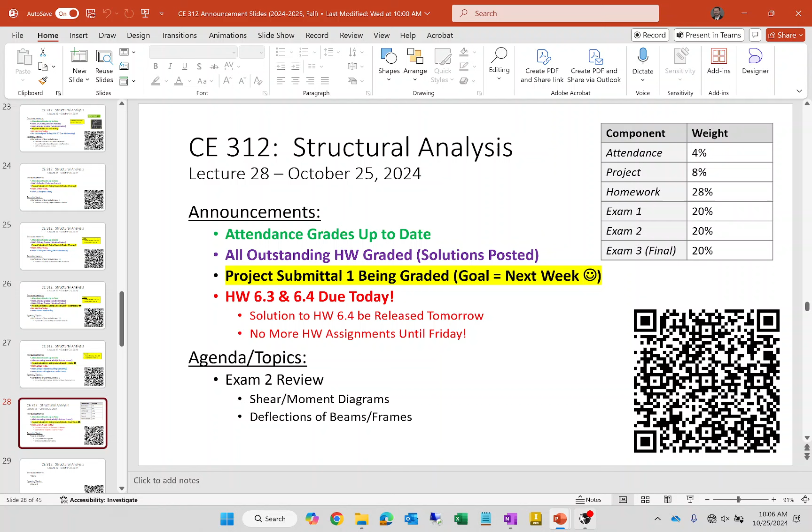And I think you'll find that it'll be homework 7. You'll spend more time on homework 7 sort of formatting the submission as opposed to actually doing the work. It'll be pretty quick, and we'll have in-class examples on all that. But that's not our topic for today. Our topic for today is the exam review. Let's talk about the exam. Okay, so let me pull this up.

So first off, the exam format will be pretty much the same format as the last exam. There are a couple things worth mentioning. Number one, I think we would all agree that a straight edge would be very useful on this exam for the purposes of constructing shear and moment diagrams. I do think that would be a very worthwhile addition to what you bring on Monday. The other thing I'll tell you a little bit about the format.

So as an example, let's say I have you construct a shear and moment diagram. I will give you space to do that, like the guidelines and the lines, because is that really a test of your ability to construct a shear and moment diagram, whether you can draw a horizontal line and put a V next to it, or draw another one and put an M next to it? So I'll give you some space so that you're not wasting your time on that.

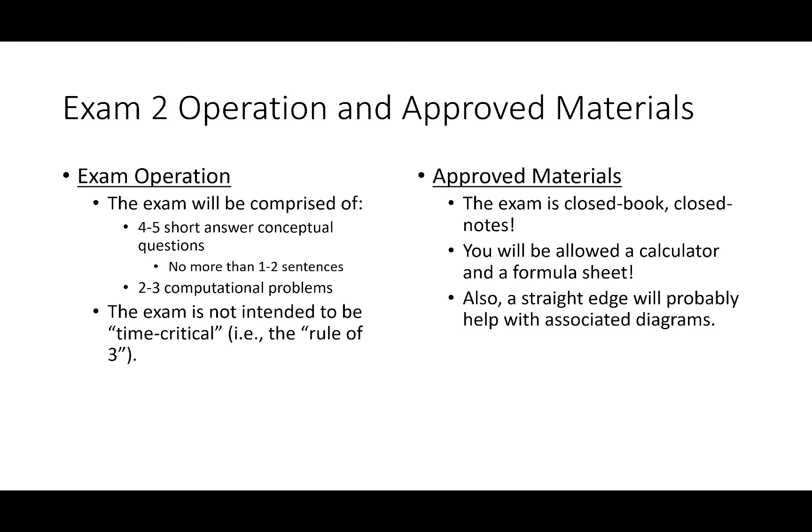I have the same rules as the formula sheet for the last one. I don't really care what you put on it as long as you make it yourself and you don't put a full start-to-finish worked out example on it. You can put snippets of examples, and I'll give you some freedom to format that formula sheet however you want. I just want you to make it. Same rules as last time.

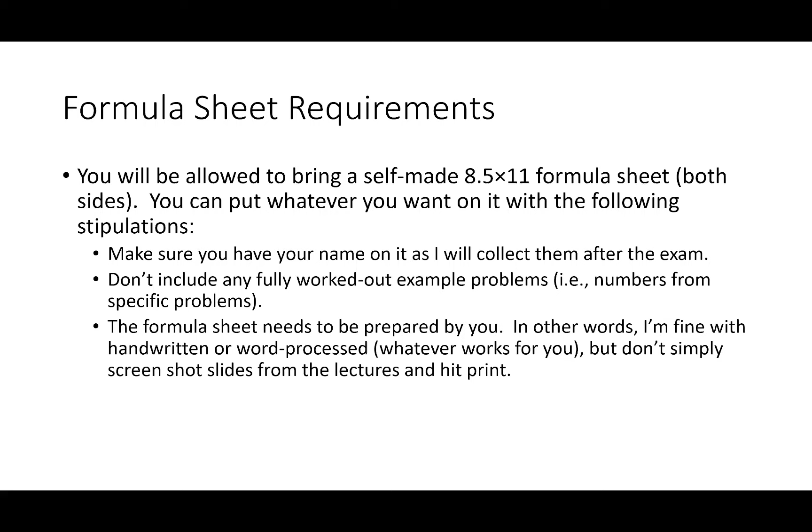Let's talk about what's on the exam, and the star of the show for the exam are shear and moment diagrams and deflections. Now, because of the nature of what we're doing in here, I do have to mention that you've got to compute support reactions too, okay? I don't mean for this exam to be a repeat of exam 1, okay?

So if you remember on exam 1, I gave you a pretty challenging support reactions problem, okay? I'm not going to do that type of exercise on exam 2, but you cannot do a lot of these analyses without the presence of reactions. In some instances, I may give you the reactions and just have you move from there. Some instances, you may have to compute them. But I don't want you to think that the computation of support reactions is totally not fair game, because it is. It's part of the analysis.

But the star of the show is deflections and shear and moment diagrams. So on the topic of shear and moment diagrams, you really need to be able to do 3 things. You need to be able to determine the internal shear and moment at any given point. And you can do that 2 ways. You can either cut a section at the point in question and write equations of equilibrium, or you can construct the shear and moment diagram and just say, what is the shear here? What is the moment here? And if the shear and moment diagrams are relatively linear, then you should be able to do that.

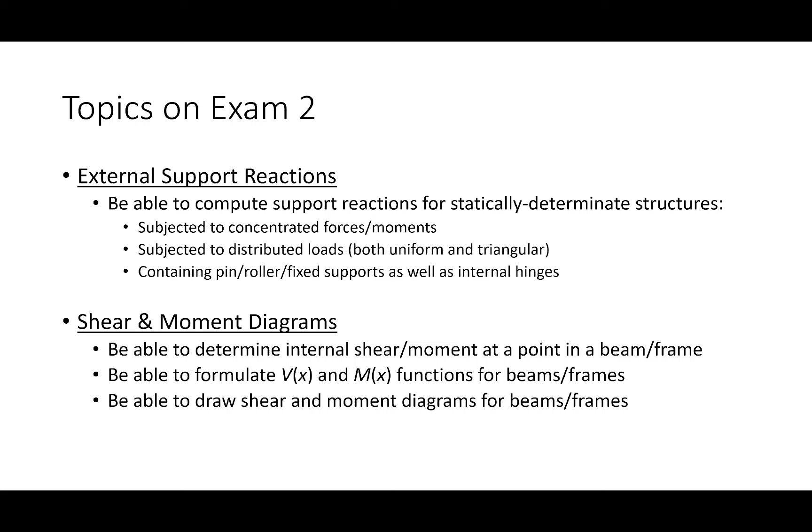You do need to be able to formulate functions, specifically shear functions and moment functions for beams and frames. So that's the algebra portion of it. And you do need to be able to draw them. You actually need to be able to construct the shear and moment diagrams, most likely using the graphical approach that we've been using this whole time.

As for deflections, yes, you do need to be able to compute deflections in structures, so you need to be able to analyze real structures and virtual structures. You need to be able to compute both displacements and rotations, and you need to be able to consider both axial and flexural deformations as appropriate. And so that's more on the behavioral aspect. Like if you remember when we were doing frames, we found that axial deformations really didn't affect the answer all that much.

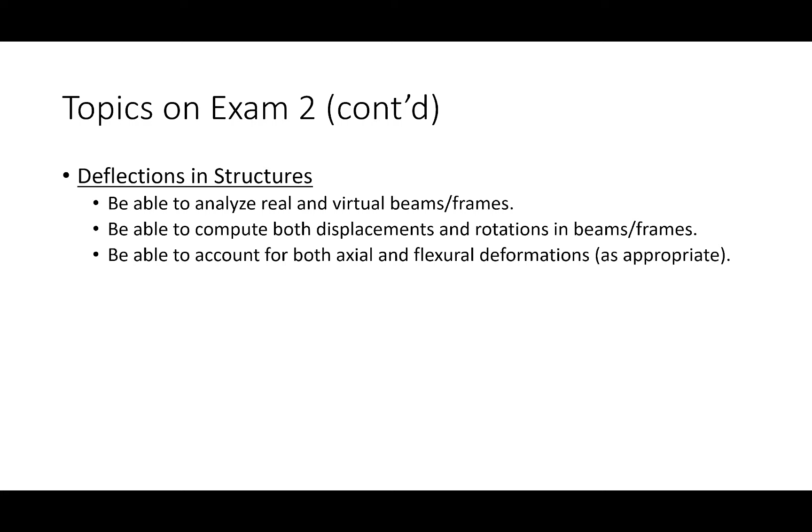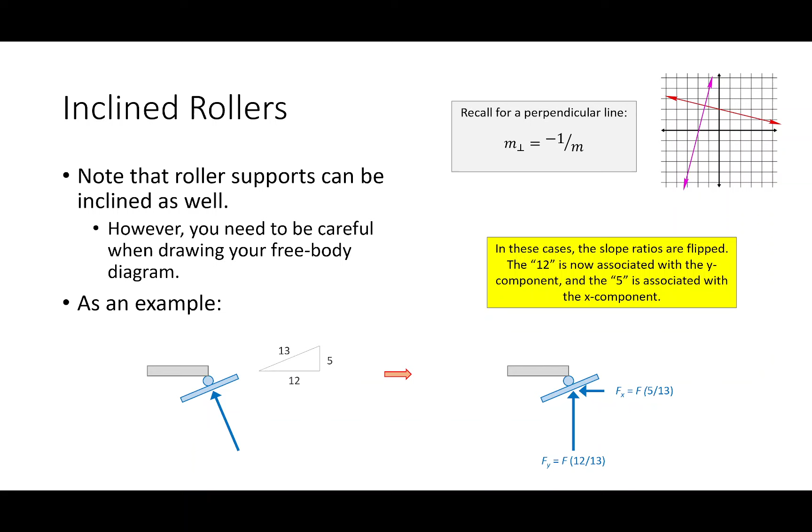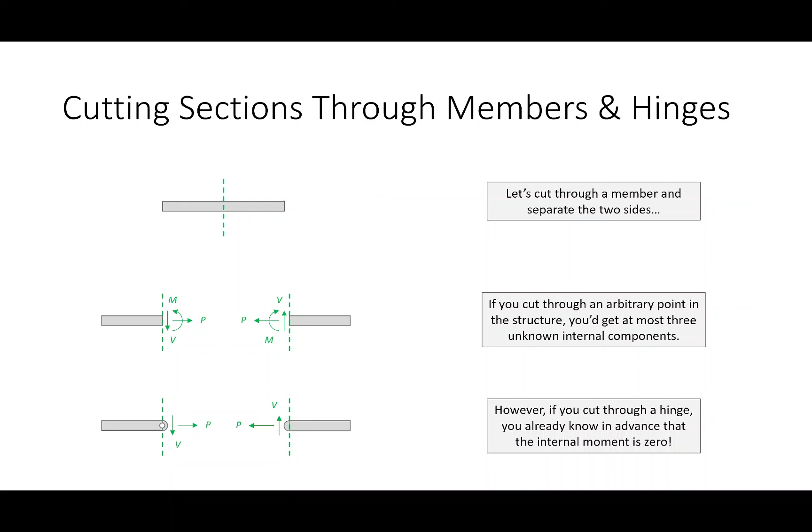The rest of this is just some greatest hits since the start of the semester. I did put stuff here on supports and inclined rollers, and honestly, I just copied a lot of this from exam 1. I'm not going to get hyper inventive again on computing support reactions, but again, you do need to be able to do it. You do need to understand that when you cut a section through a hinge, there is no internal moment. You do need to understand the derived relationship between loads, shears, and moments: if you integrate the loads, that results in the shear diagram, and if you integrate the shears, that results in the moment diagram.

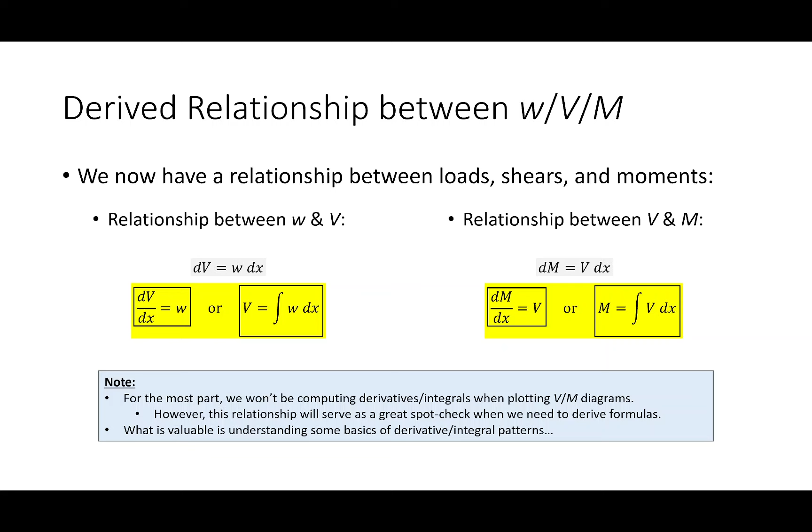This is our graphical approach, and we've been using this slide. A lot of times we breezed past it, but we really used this slide for the past 3 weeks. If we're looking at the relationship between load and shear, at any given point, the slope on the shear diagram equals whatever the load is right up above. And between any 2 points, the change in shear is equal to however much load there was between those 2 points. So for example, with a beam with a series of point loads, between those point loads there's no load, so the shear diagram was flat. That's why we got that stair-step pattern on shear diagrams with point loads.

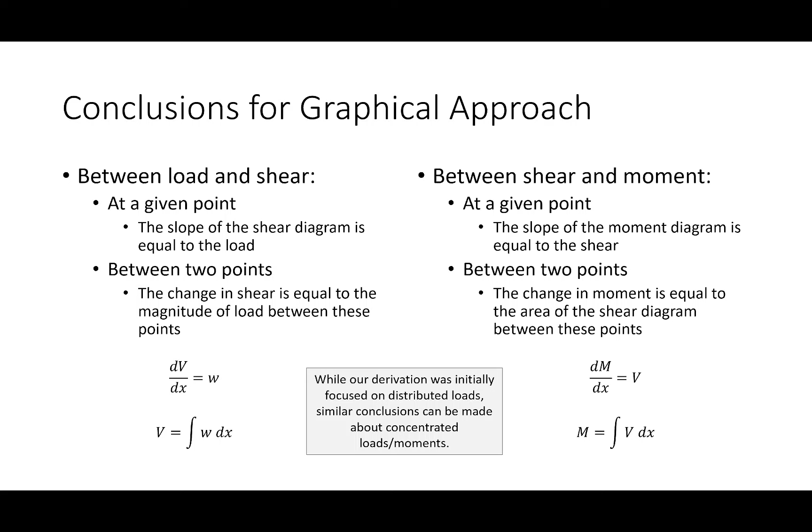And we can make the same determination between shears and moments. At any given point, the slope of the moment diagram is equal to the shear, and between any 2 points, the change in moment is equal to the area of the shear diagram.

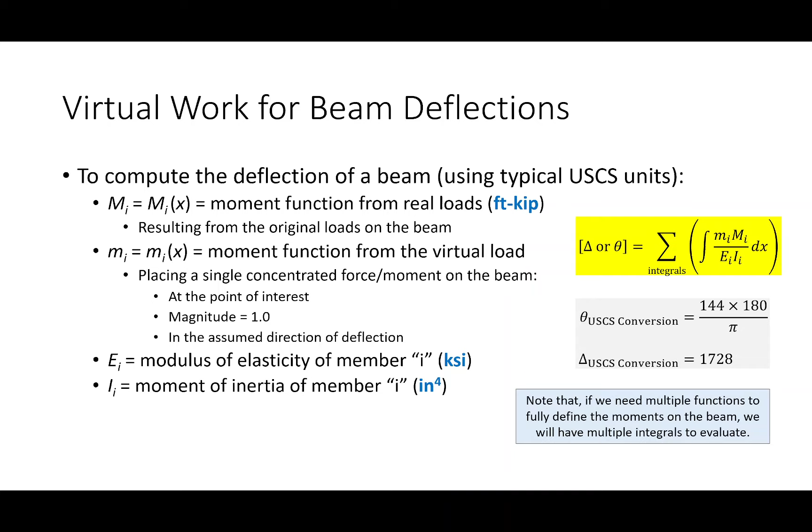We have our expression for virtual work, and this is where I said we're going to need to compute both real and virtual moment functions in order to be able to integrate. So we will have the real moment function, the virtual moment function, and then EI, and we will integrate accordingly. Don't forget your unit conversion factors here: 1728 for deflections, 144 times 180 over pi for rotations. And I really don't have anything else to say. That's the exam.